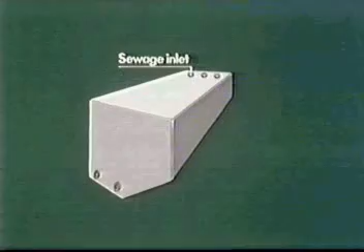The simplest system is holding tanks, from which there is no discharge overboard in restricted waters. Such tanks retain collected waste and flush water until discharge ashore or in unrestricted waters is possible.

There must be an aeration connection so that air can be bubbled through the waste, as otherwise septic or anaerobic conditions will arise, resulting in toxic, corrosive and inflammable gases being formed, and the waste could solidify.

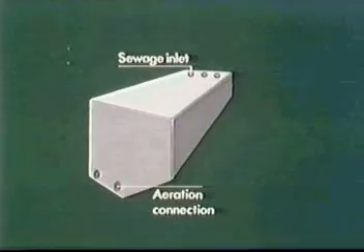A vent from the top of the holding tanks must be fitted, together with an ullage opening, so that the level of the content may be ascertained. A flushing connection and discharge pipe is fitted for use when discharge is permissible.

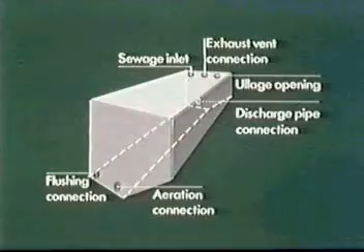Clearly, the great disadvantage of such a system is the capacity required in the holding tanks, particularly if there are likely to be long periods between occasions when sewage can be discharged ashore or in unrestricted waters.

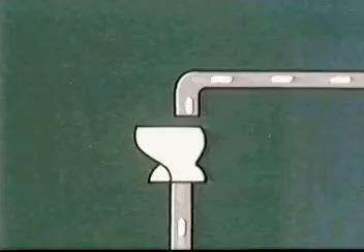A system which reduces the required capacity of holding tanks by about 98% is known as the chemical recirculating system. The toilets are flushed with a liquid which contains alkaline sterilizing chemical antiseptics, so chemical action starts at once.

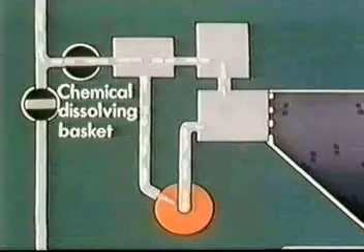The sewage is passed to a chemical dissolving basket, where a chemical is added to remove color and odor and help settling of solids by flocculation.

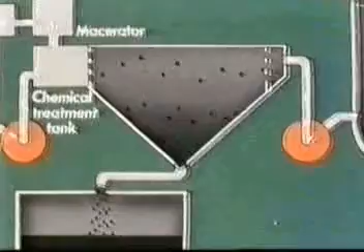It is then passed to a macerator which grinds up all solid material. After this it is passed to a chemical treatment tank where another chemical is added which liquefies organic matter and sterilizes the fluid. Some part of this liquid is recirculated through the 3 stages, ensuring good maceration and mixing.

From here, the liquid passes to a settling tank, in which all solid matter settles and is transferred at intervals to a holding tank.

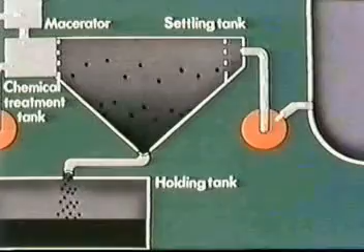In some systems, most of the solid matter is separated and conveyed to the holding tank at an earlier stage by means of a moving belt, but a settling tank is still retained for any residual solids.

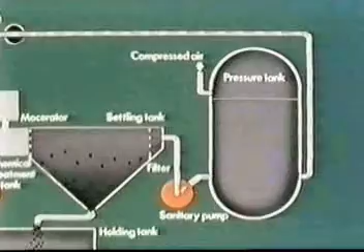From the settling tank, sterilized fluid passes through a filter and is pumped by the sanitary pump to a pressure tank, into which compressed air is admitted to keep the fluid under pressure.

The fluid in the pressure tank is used for flushing the toilets in the ship, so that when in restricted waters, no additional water is obtained from the sea, and the holding tanks can be comparatively small, about 2 litres per man per day.

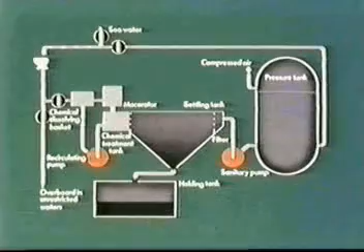In unrestricted waters, the whole system can be shut down and seawater used for flushing toilets, the sewage being directed back to the sea. The holding tanks can also be flushed out, but the plant should be left containing flushing fluid to minimize corrosion.

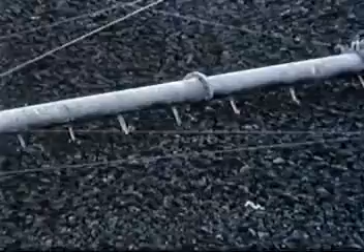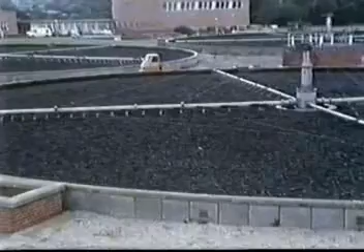Yet another method is the biological system, the system that's universally used for treatment of municipal waste. On ships, seawater is used and the effluent disposed of overboard. This effluent is harmless and meets IMCO requirements.

Certain microorganisms make use of human waste as food material. Organisms which do so in the absence of oxygen produce toxic, corrosive and inflammable gases and are not used at sea. But others digest waste only in the presence of oxygen and produce no dangerous gases, mostly carbon dioxide.

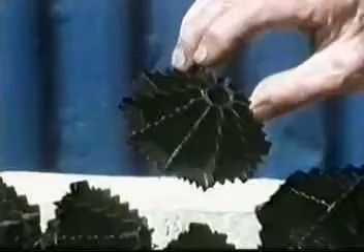One such system is known as the trickle filter. Certain aggregate materials are capable of holding large communities of microorganisms, and the wastes are allowed to trickle through these aggregates, as here ashore. In plants designed for shipboard use, small pieces of plastic are used instead of aggregate.

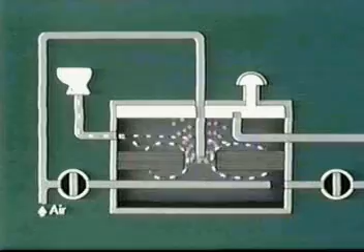This is a diagram of a typical system. Sewage from the toilets enters the filter tank and sinks through the trickle filter. Compressed air is bubbled from a pipe about the middle of the filter and causes an airlift, so that the sewage is returned to above the filter and sinks through it again, resulting in a continuous circulation.

The air passing through the filter dissolves in the sewage and results in a multiplication of the bacteria. These digest the sewage and give off unobjectionable gases, mostly carbon dioxide. This and any undissolved air are vented at the top. Sludge collects in the filter and falls off to the bottom of the tank from time to time.

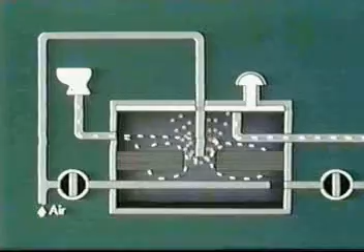When the level of the liquor gets high enough, clear effluent spills over into this pipe. The pipe is placed centrally so that the spillover is unaffected by the pitch and roll of the ship.

The clear effluent is chlorinated and passed to a tank which provides time for the chlorine to disinfect the effluent. A float switch is provided in this tank, and when the effluent reaches a certain level, the discharge pump is started for discharge overboard.

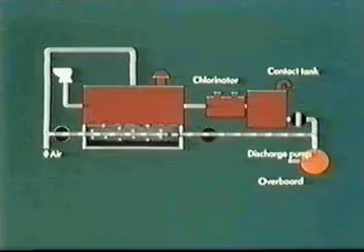Periodic desludging of the filter tank can be carried out in unrestricted waters. To do so, this air valve is opened, as is the valve on the desludging pipe, and the valve from the contact tank is closed. This causes the air to bubble through the length of the filter tank and the disturbed sludge to be drained through the discharge pump overboard.

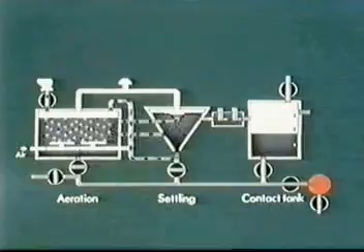Another system using microorganisms is known as the extended aeration process. In this there are three separate compartments: an aeration compartment, a settling compartment, and a chlorine contact compartment.

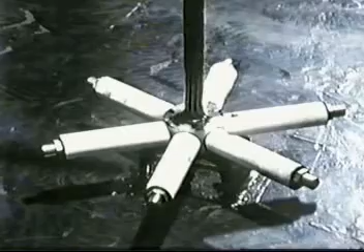The incoming sewage is held in the aeration compartment for approximately 24 hours. Here it is digested by the microorganisms and the emitted carbon dioxide is vented. Air is supplied to the sewage through a number of fine bubble diffusers located at the bottom of the tank.

This is such a diffuser. This provides oxygen for the microorganisms and also keeps the contents of the tank intimately mixed with the raw sewage and returned activated sludge. The water with bacteria cells is displaced into the settling compartment.

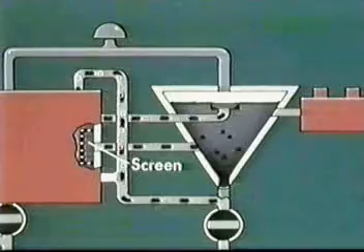Here the bacteria settle out and are returned by means of an airlift tube to the aeration compartment. The settling compartment is of the hopper type, the sloping sides preventing the settled sludge from accumulating and directing it to the suction side of the airlift.

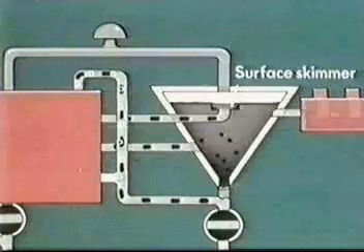The effluent from the aeration compartment enters the settling compartment through a coarse screen. The activated sludge having settled out, clear effluent is discharged via a weir at the top. A surface skimmer is provided to skim off the surface debris and return it to the aeration compartment.

The clear effluent from the settling compartment passes through a chlorinator and is stored in the contact tank to allow time for the chlorine to kill off any harmful bacteria. Waste water from baths, etc. can also be admitted to this tank.

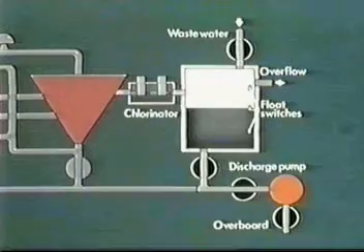Two levels of float switches are provided, so that when the liquor reaches the upper one, the discharge pump is started to discharge overboard, and when the liquor drops to the lower one, the pump is switched off. A third float switch, higher than the other two, is fitted to sound an alarm should the liquor rise above the normal high-level position. An emergency overflow is also fitted at this level.

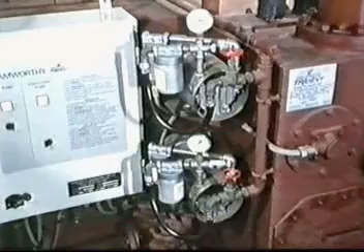This is a typical extended aeration plant. The raw sewage enters here directly into the aeration compartment. It will normally have been macerated before entry.

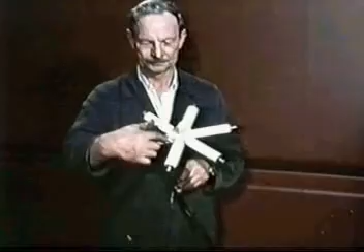There are two air compressors which are fitted with filters to ensure clean air. One is on duty while the other acts as standby. They are changed over from time to time.

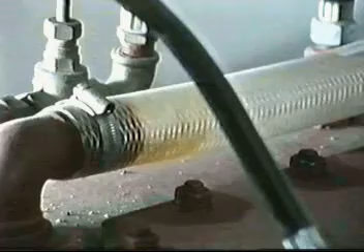The compressed air is piped to the bottom of the aeration compartment where it bubbles through diffusers similar to this one. The air enters down this pipe and bubbles out through these six ceramic elements. Elements can easily be removed and replaced from time to time.

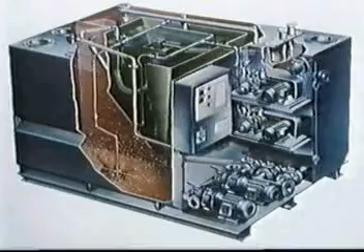The compressed air also provides the air lift to recirculate the sludge from the settling compartment. The sludge passes along a transparent tube above the tank so that a visual check may be made that the recirculation is taking place properly.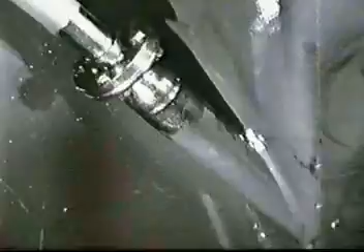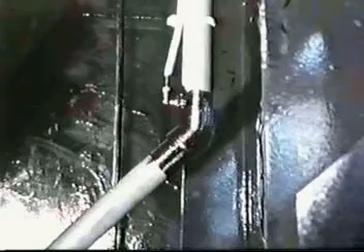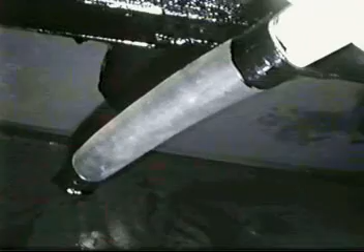Activated sludge from the bottom of the settling compartment passes up this pipe. This small pipe contains the compressed air which provides the airlift. The sludge is thus returned via a section of transparent pipe to the aeration compartment. Surface debris in the settling compartment is collected by the skimmer and is also returned to the aeration compartment. This pipe from the centre of the skimmer carries clear effluent from underneath the skimmer via a weir to the

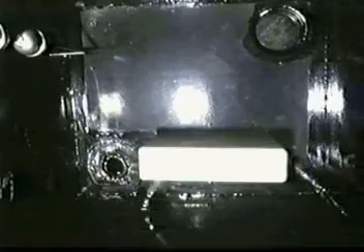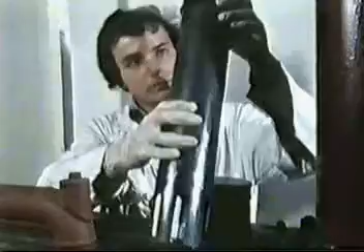chlorinator. The chlorinator contains two tubes containing chlorination tablets. These tubes have holes in the lower ends to allow the effluent to enter and come out again. From the chlorinator, the effluent passes to the contact tank, into which may also be directed water from baths, laundry, etc., through this pipe.

When starting up the equipment, and thereafter at least once a week in restricted waters, make sure there are sufficient tablets in the chlorinator. Never allow the level of tablets to fall below a quarter full.

Stow and handle all chemicals for sewage treatment strictly in accordance with the manufacturer's instructions. Never allow chemicals to become damp or contaminated with oil. They may be corrosive to the skin, spontaneously flammable, or even explosive. They should always be stored in their original containers in a cool, dry place.

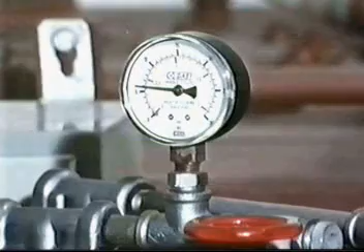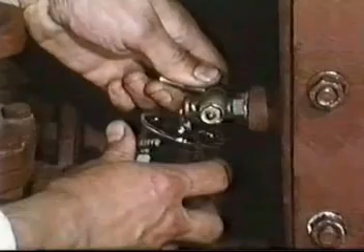Then check that the valve from the air compressor is open and switch on one of the two air compressors from the control panel. Check that the pressure gauge is reading between 0.34 and 0.54 bars. Check that the activated sludge is being returned to the aeration compartment by inspecting the transparent pipe on top of the tank.

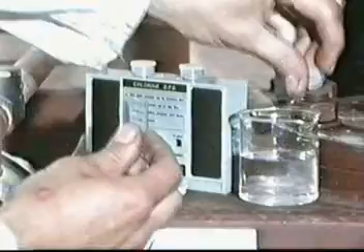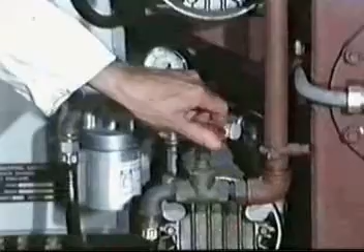At least once a week, the residual chlorine content of the effluent should be checked by taking a sample from the sampling valve. The sample can then be tested with the test kit provided. If the chlorine residue is above 5 parts per million, as the dark colour here indicates, use only one tablet tube instead of two in the chlorinator.

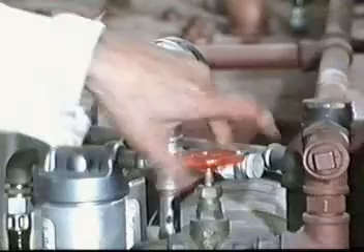Once a month, change over from duty to standby air compressor. Ensure that the delivery valve of the standby compressor is open before operating the changeover switch. Close the delivery valve on the unit not running.

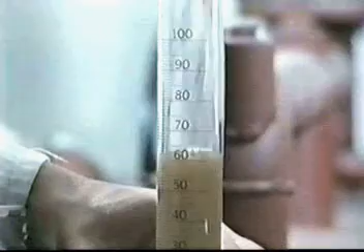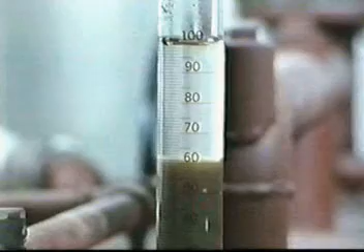Check the contents of the aeration compartment for quantity of suspended solids, filling a graduated cylinder from the sampling valve to the 100 milliliter level. Allow the contents of the cylinder to settle for 30 minutes. If the level of the sludge is above the 60 milliliter level, the unit must be partially desludged.

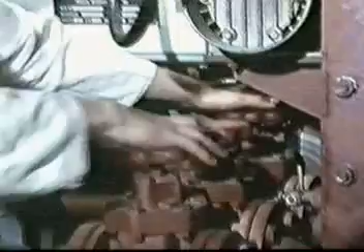To partially desludge, which should normally be done every 2 or 3 months and in unrestricted waters, shut down the unit for half an hour and allow to stand.

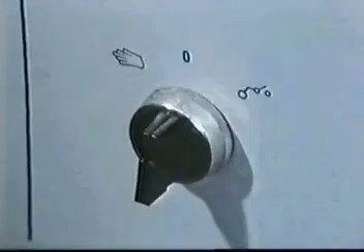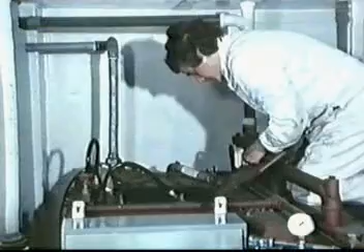Now close the contact tank drain valve and open the settler drain valve. Switch on the discharge pump. This will drain the sludge from the settler tank and from the aeration tank through the settler. When the aeration tank is about 25% full, the pump will lose suction and should be stopped.

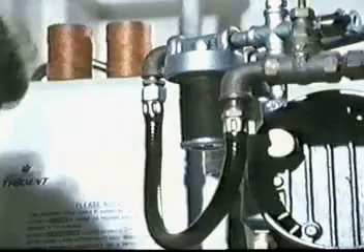The cover in the top of the aeration compartment is removed to check the screen is clean. The cover of the settler compartment is also removed to check that the interior is clean. If it is not, it should be hosed down with clean water.

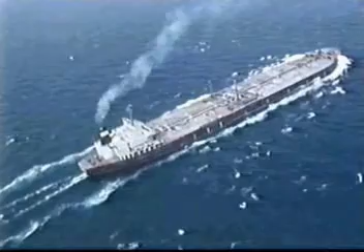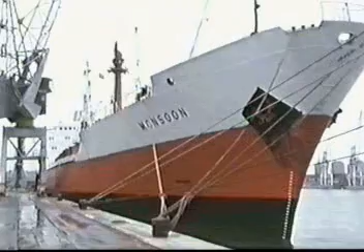Every 6 months, the filter elements on the air compressor should be checked and replaced if necessary. The non-return valves in the air compressor's discharge should also be checked. Every 12 months, all compartments should be drained and cleaned. This should be done when the ship is in unrestricted waters for a long period, or when in dock where there are facilities for discharging ashore.

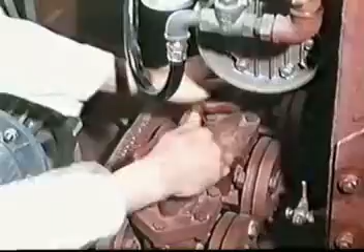To do this, the sewage and wastewater inlet valve should be closed and the contents of the contact tank pumped overboard.

Then the discharge pump is switched off. The drain valve of the contact tank should now be closed, and also that of the settler compartment, if it is not so already. The drain valve of the aeration compartment should now be opened.

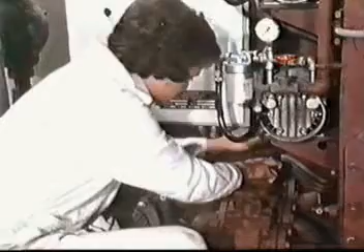Now the discharge pump is turned to hand and the pump switched on. This will result in the aeration tank being completely drained and all its sludge removed. When it is empty, its drain valve is closed and the drain valve of the settler is opened. This will drain the settler in the same way.

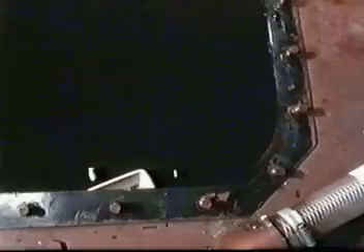Now the drain valve of the settler is closed and the pump switched off, and the valves either side of the pump are closed. The whole unit will now be empty.

The inspection cover should now be removed and the interior inspected. Recoat any damaged areas with high-grade coal tar epoxy if necessary. It should be mentioned that nothing should ever be welded to the exterior of the unit, as this will destroy the internal coatings. Also, the cover joints should be inspected and renewed as necessary.

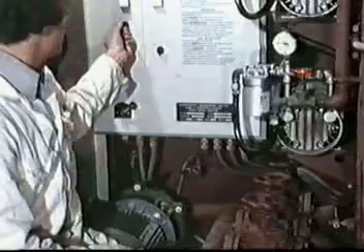When all this has been done, the unit is refilled by opening the drain valve of the aeration compartment and also the refilling valve. When the unit is again full, the aeration compartment drain valve and refilling valve are closed. The sewage and wastewater inlet valves, the contact tank drain valve, and the valves on either side of the discharge pump are all opened. The air compressor is switched on and the discharge pump is switched to automatic.

The unit is now once more in operation, but it will take some 10 days to a fortnight for new colonies of microorganisms to form, during which time partially untreated sewage will be discharged. Full desludging should therefore only be carried out when the ship is in unrestricted waters for an extended period.

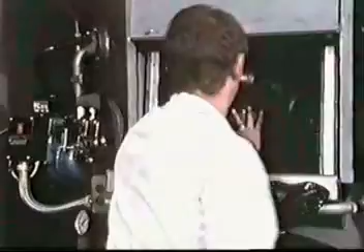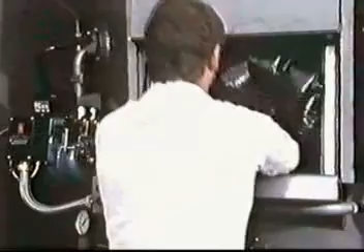Partial desludging can be done in unrestricted waters every 2 or 3 months. If, however, the ship is equipped with an incinerator, limited quantities of sludge can be incinerated daily.

In this type of incinerator, solid waste is loaded generally in plastic sacks. An auxiliary burner is lighted to ignite the waste. A forced draft is provided. After a while, the auxiliary burner is extinguished automatically, and the waste will continue to burn on its own. An average day's waste for a crew of 30 or 40 can be incinerated in about 30 minutes.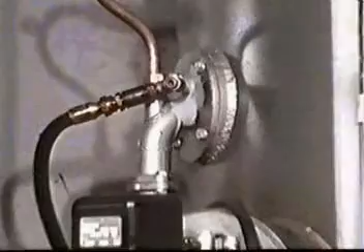By now, the incinerator is hot enough to burn the liquid waste, both oil sludge and sewage sludge. Since sewage sludge is about 98% or 99% water, only a limited quantity can be disposed of daily, unless fuel is wasted by continuing to use the auxiliary burner.

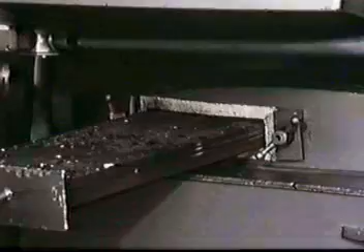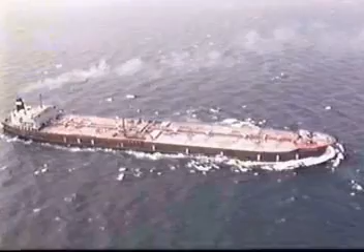A desludging valve on the sewage unit allows the sludge to be pumped to the incinerator sludge tank. This is connected to a separate burner on the incinerator. When all the waste has been burnt and the incinerator has cooled down, the ash and non-combustible material is simply removed from the combustion chamber by pulling out the ash slide. The rotating arm will scrape all the residue into the ash box.

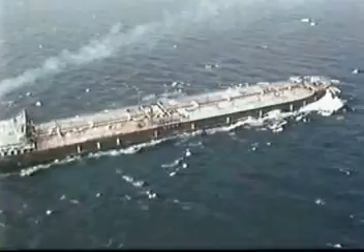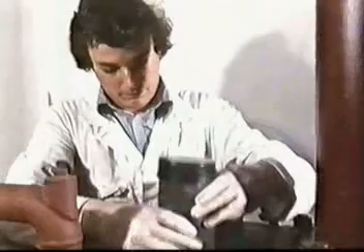When in unrestricted waters, ships fitted with holding tanks or chemical treatment plants should discharge all sewage and accumulated waste overboard. Holding tanks, sludge tanks and sewage plants may then be flushed out. Biological plants, however, should not be shut down, though the effluent need not be chlorinated. If such plants were shut down, the colonies of bacteria would become inactive, and it would take 2 to 3 days to reach full efficiency.

Before entering restricted waters, check that the plant is fully supplied with flocculating and disinfecting chemicals as required. Ships with biological treatment plants should have the chlorine tablet tubes replaced in the chlorinator.

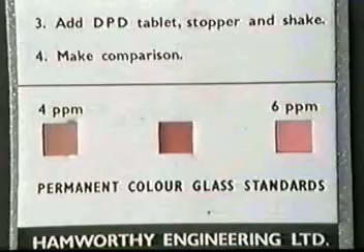In the case of ships with holding tanks or chemical plants, sewage is now directed into these plants. In ships with biological plants, the sewage will of course already be entering them.

When in port, plants must be kept in operation. The overboard discharge should be tested for residual chlorine and the chemical stock checked.

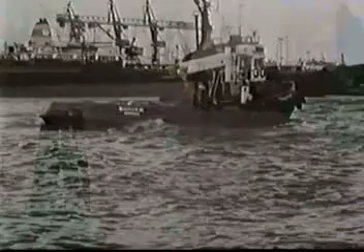Ships fitted with such equipment, properly maintained and used according to the maker's instructions, will discharge effluent that meets all countries' regulations. So study carefully the operator's manual for the sewage treatment equipment on your ship. Such will be ships that pass in the night and leave no trace.